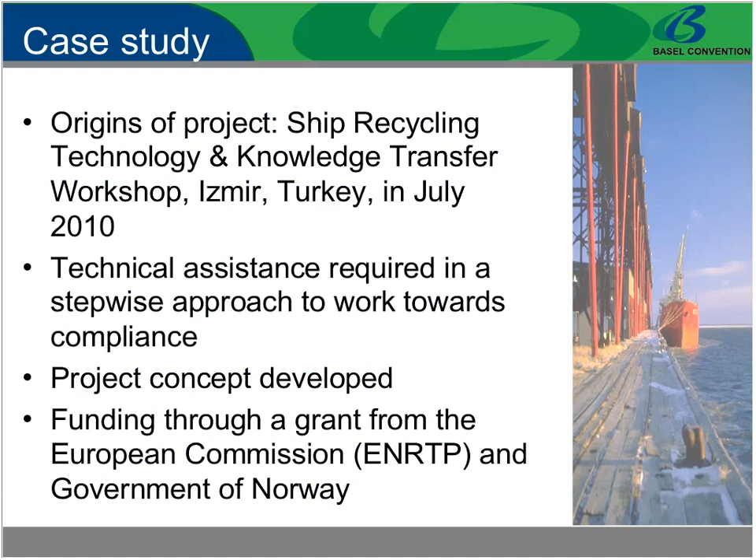I'm going to give you an overview of the case study and also a flavour of the guidance and training materials right towards the end. The work on that is just being finalised, and of course some feedback may even come out of this discussion that could be useful for that.

So I'm going to talk first about the preparatory work before we developed the case study. That initially required a number of field missions to Pakistan to observe current practices, undertaken by a local consultant. A field mission to Turkey was also conducted, because Turkey is considered a useful model in relation to studying ship recycling, particularly for the target countries of this case study and guidance. Then there was attendance at relevant meetings of the Basel Convention and the IMO Marine Environment Protection Committee with respect to ship dismantling. Those three elements contributed towards the background for developing the case study itself.

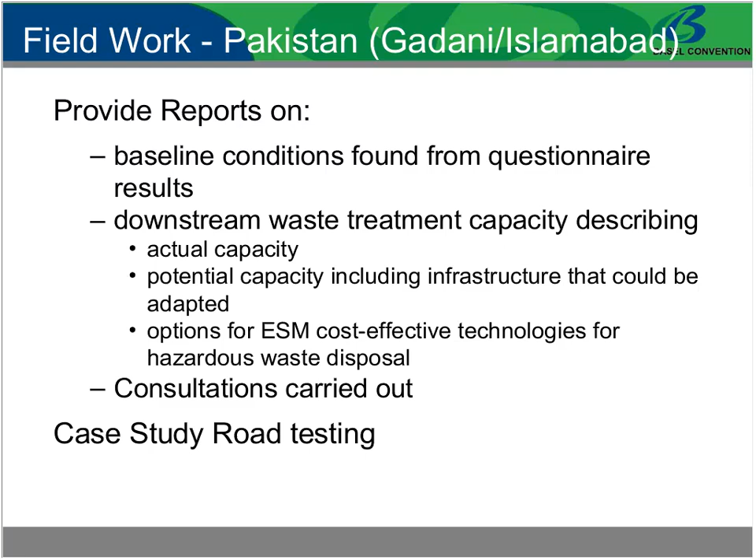The development of the compliance models then really focuses on the issue of environmentally sound management of hazardous materials and hazardous waste, which involves identification, removal, handling, storage and preparation for dispatch to downstream waste management facilities at a ship recycling facility.

I should stress at this stage that although the Hong Kong Convention and the Basel Convention cover a wide range of issues, these are, if you will, the highlights - the specific areas that this study is covering. We recognize there are overlaps and very close linkages with, for example, occupational health and safety, and inevitably they come into some parts of the discussion, but they're not the main feature of this particular study.

So we're identifying appropriate waste management channels for the key hazardous waste materials, looking at those specifically on board ships, for example as set out in the Hong Kong Convention's inventory of hazardous materials. That will lead us to devise methods to strengthen linkages between the Basel and Hong Kong Conventions throughout the entire ship recycling process. One can imagine that in the future both Basel and Hong Kong Conventions can be enforced, and how those two interplay smoothly will be an important issue.

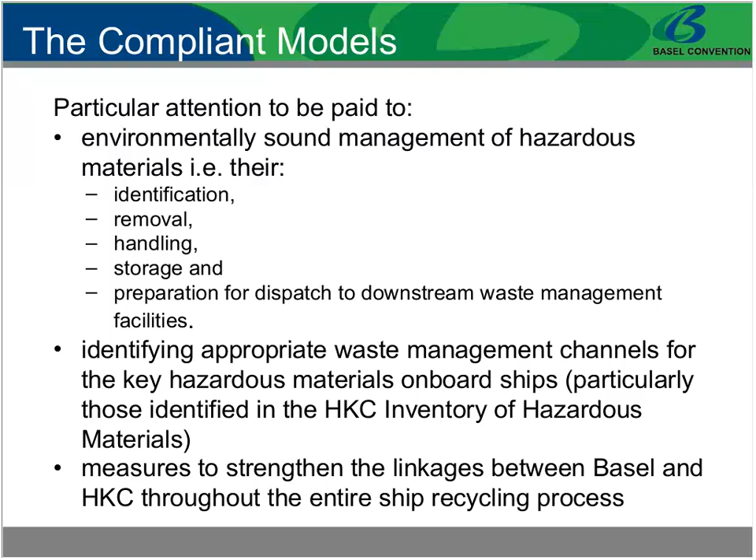So some findings from the field studies. We've looked in particular at Turkey, as I mentioned. The site is at Aliaga on the Aegean coast, and there are a number of facilities there, all with various certifications, quality management systems, and permits. They process around 300 ships a year, which is about 650,000 light displacement tons - that's the actual weight of the ship in effect. They use landing and afloat, or alongside, methods, as it's a fairly hard base to start with on the Mediterranean coast there.

Over time, the facilities have substantially developed hard standing with concreted roads and cutting areas. That's been developed over the last, I would say, 10 years or so. These facilities have been subject to continuous improvement - it's been active there since about 1974. Legislation has gradually developed to follow the Basel Convention for its management, as well as looking forward to the Hong Kong Convention.

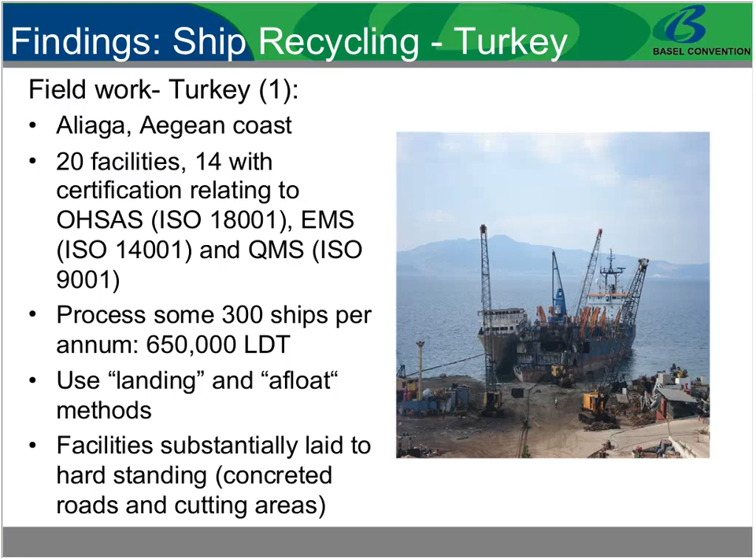Perhaps fairly rare, the Ship Recycling Association of Turkey is also operational. It is certainly an interesting feature of the way that they work there. They have a waste management centre which provides specialist training and specialist techniques, such as for asbestos removal and storage for liquids, available to all operators at the facility.

But off-site, they take hazardous waste from ship recycling over to specialist incineration, some distance away, and to hazardous waste landfills, particularly for materials like asbestos, which is the normal route for such waste.

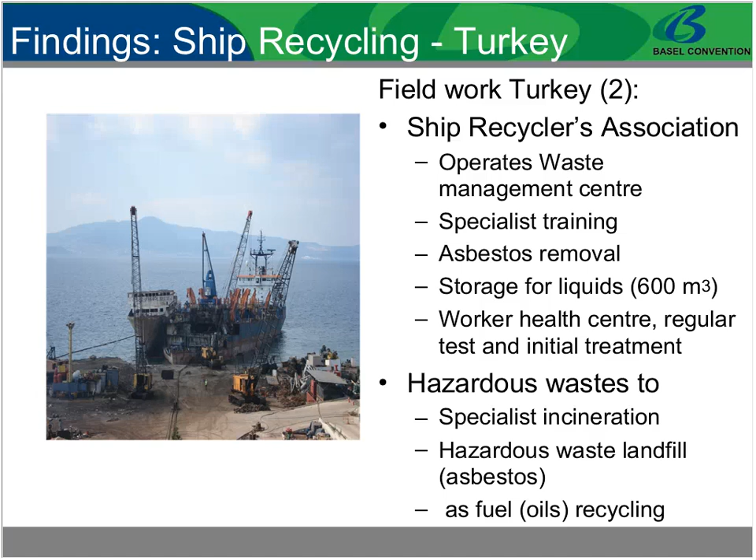Another feature of the field studies we discussed at length with the representatives of the ministries is that there are several of them involved. This is not an unusual situation where you have typically ministries of shipping, environment, and industry, so the legal framework for ship recycling can be quite complex. There can be a number of different pieces of legislation, all of which apply either on-site at the ship recycling facility or off-site.

They apply in Turkey the Basel Convention controls for hazardous waste import and have local inspectors that carry out the inspection work. I think it's important to notice that they have emphasized in discussions with us that they do actually carry out enforcement action when considered necessary, in order to back up the inspections and the legislation.

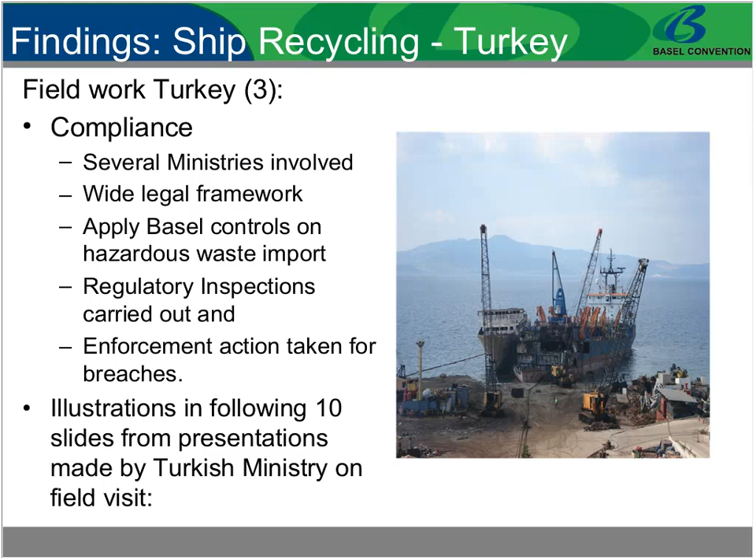Now, what better to describe how they do what they do than to actually use some of their own work. You might call that plagiarism, I call it a compliment. But the next 10 slides will show you some of the work they've done themselves that they've presented to us. So thanks to them for some description.

That's an example of the legal framework, this is simply for waste. I won't dwell upon the slide, but it shows you the level of complexity required to cover the many different aspects for sound and proper environmental management of the huge variety of materials that arise as waste requiring control. That's not unusual.

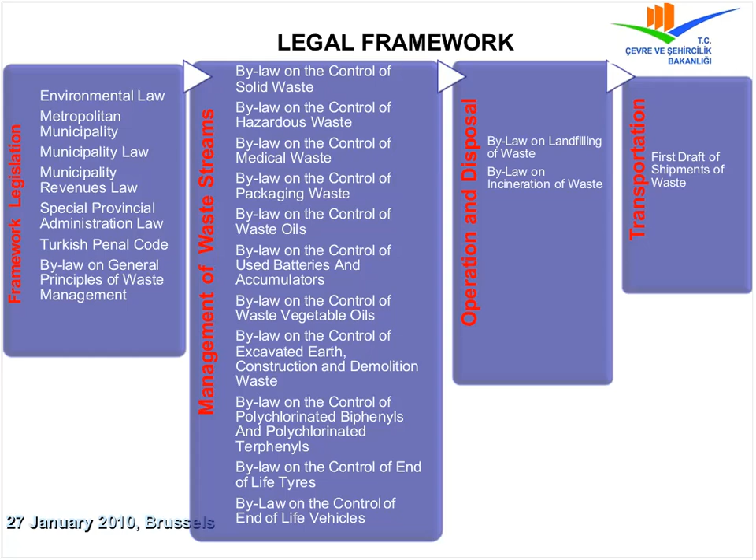Turkey also has a National Waste Management Plan. It covers the current 5-year period up to 2013, with a number of key waste streams, a dozen of which you can see there. They include hazardous waste, which would come from ships as well, requiring to be managed properly and strategically to make sure sufficient capacity is available.

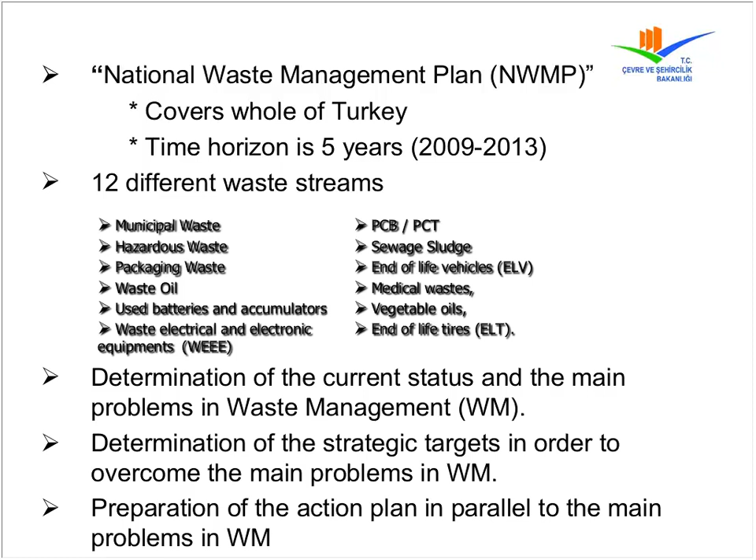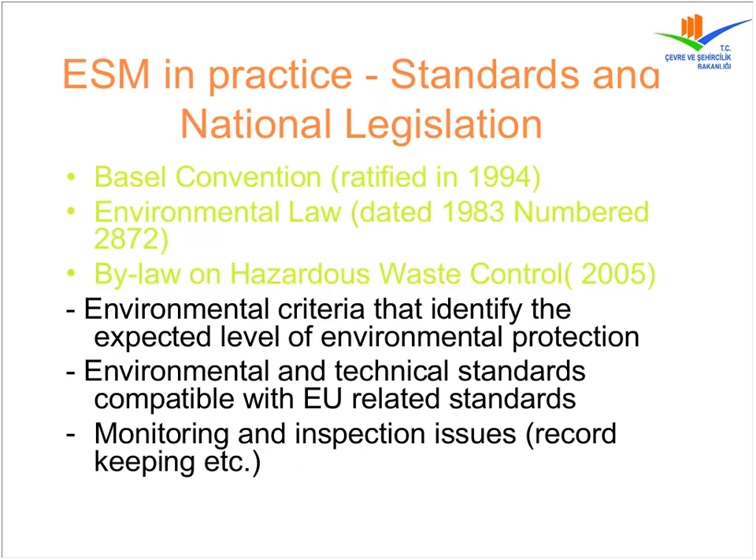They work on the basis of the Basel Convention through the environmental law of 1983 and the bylaw on hazardous waste control. They identify criteria for the expected level of environmental protection and have set standards against which monitoring and inspection can be carried out.

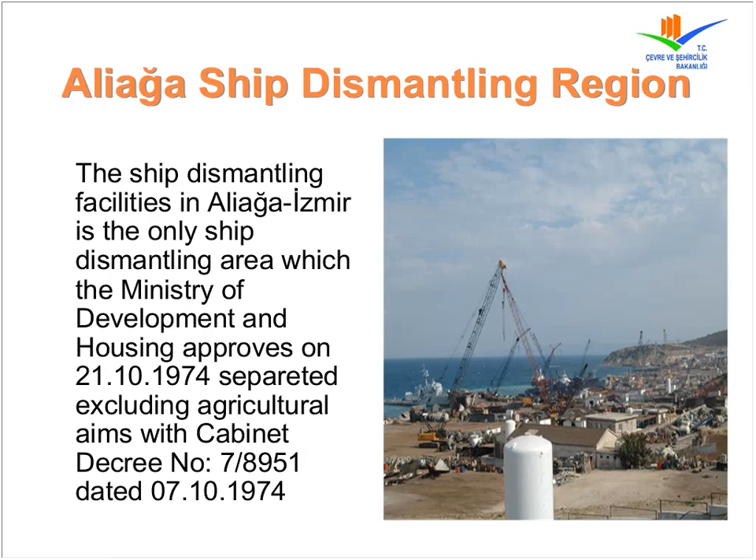It is, I think, as many will know, the only region in the area, which makes it a very suitable case from the point of view of this case study.

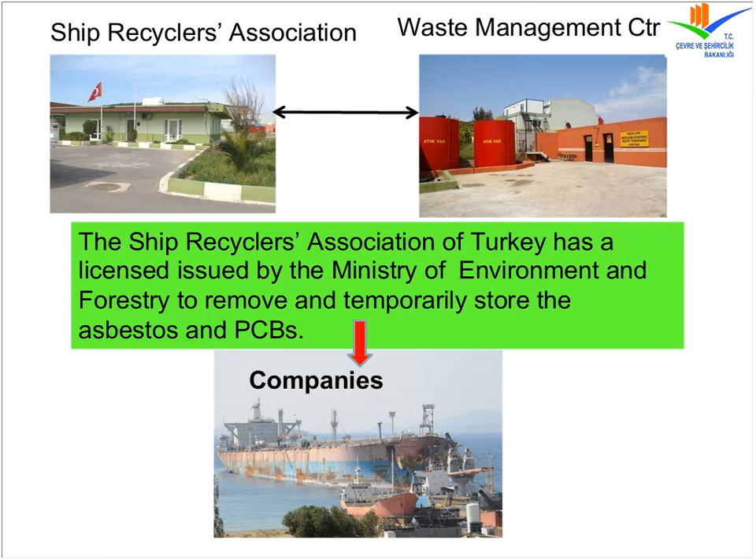Just a couple of pictures of the Ship Recyclers Association facilities, which has got a nice liquid and solid waste storage facility for use by companies.

Inevitably, with all that legislation, there'll be quite a few documents, and the local region, İzmir. The provincial directorate requires all of these and some more, I wouldn't be surprised, in order to make sure that all aspects for ship import for recycling are covered. Notice particularly the ship recycling plan, part of the Hong Kong Convention, is already there as part of their requirements.

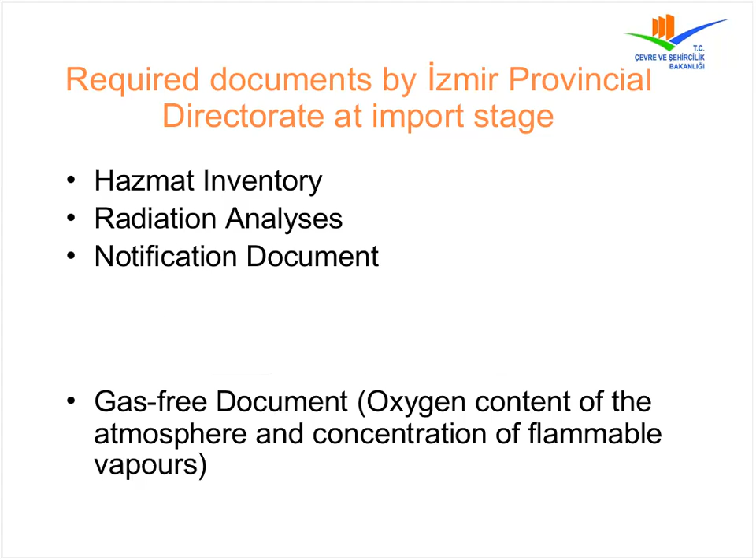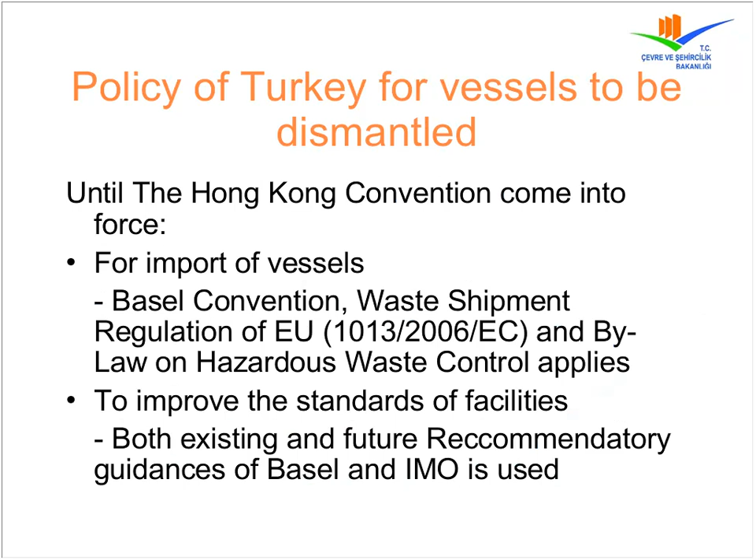The basic policy of Turkey is, as we've said, based around the Basel Convention, until the Hong Kong Convention comes into force, using the current guidelines of the Basel Convention and the MEPC approved IMO guidelines on ship recycling for the Hong Kong Convention. Not yet in force, of course, but they have been agreed, and therefore they're useful models to take into account.

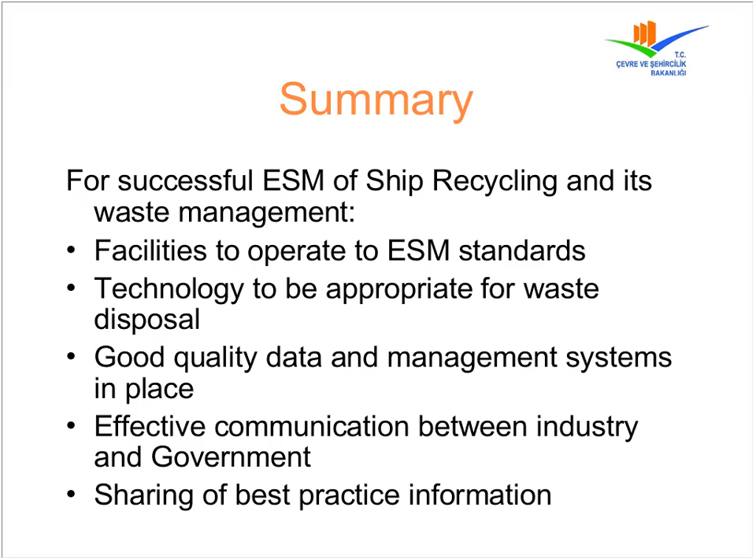So that's Turkey's summary of the way in which they carry out environmentally sound management - facilities operating to ESM standards, technology appropriate for the waste disposal. They use management systems and data and information, and the communication is a good point between the industry and the government, without which it's very hard to achieve effective compliance and sharing of best practice information.

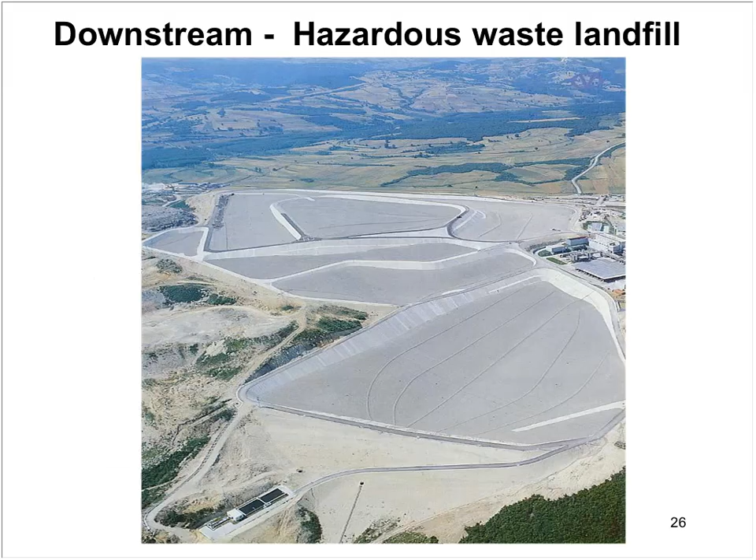Just some words on the field studies that were undertaken in Pakistan. This is where the beaching method is used. In some senses it's not dissimilar to that used in Turkey, where in effect the boat is hauled up onto the shore and dismantled. So the baseline report looked into this.

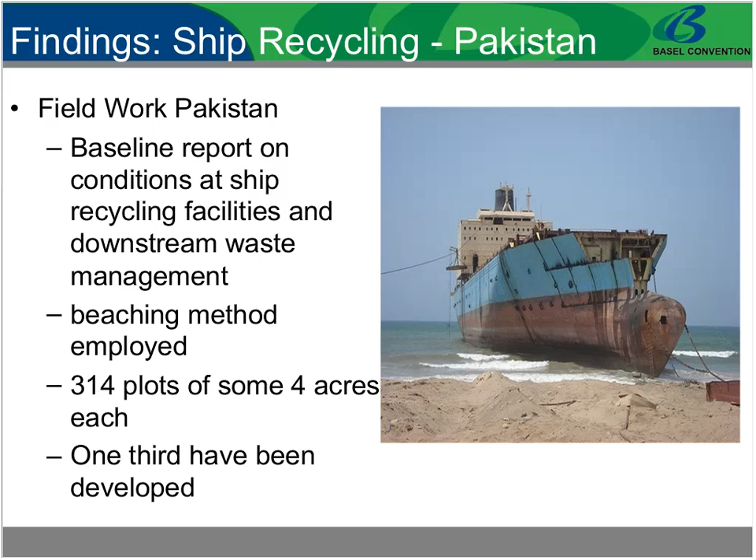There's a larger site, 314 plots of about 4 acres each, with some one third of these being developed. An earlier study from the World Bank was reviewed as part of this work, and identified a number of features of the facilities at Pakistan, amongst which was that asbestos is going to remain a significant long-term problem, as it was known to be still there in some fairly newly built vessels.

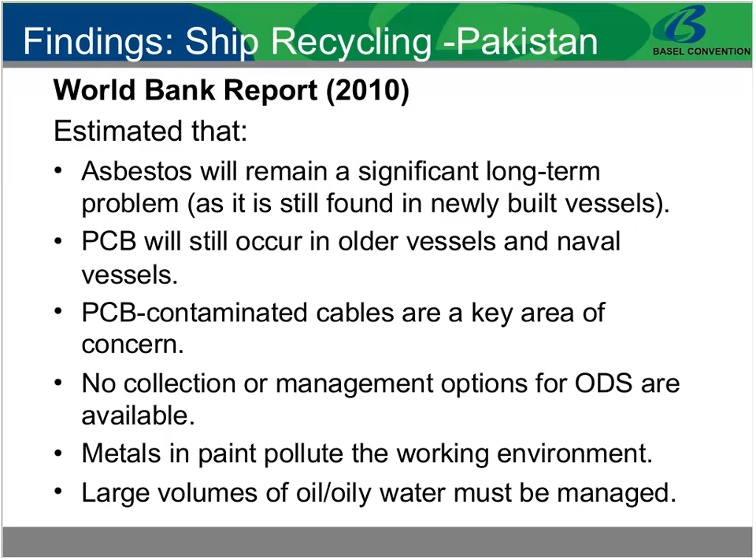Polychlorinated biphenyls still occur in older vessels and naval vessels, in cabling and various other parts of a ship. They could be solid or could be liquid in the case of transformers, where used as a dielectric. The cables themselves are a particular area of concern that isn't necessarily always looked for. There appeared to be a lack of collection and management options for ozone-depleting substances, like those used in firefighting and other means. The method of dismantling does give rise to paint chips, which themselves can pollute the working environment. And inevitably there are volumes of oil and oily water that need to be managed.

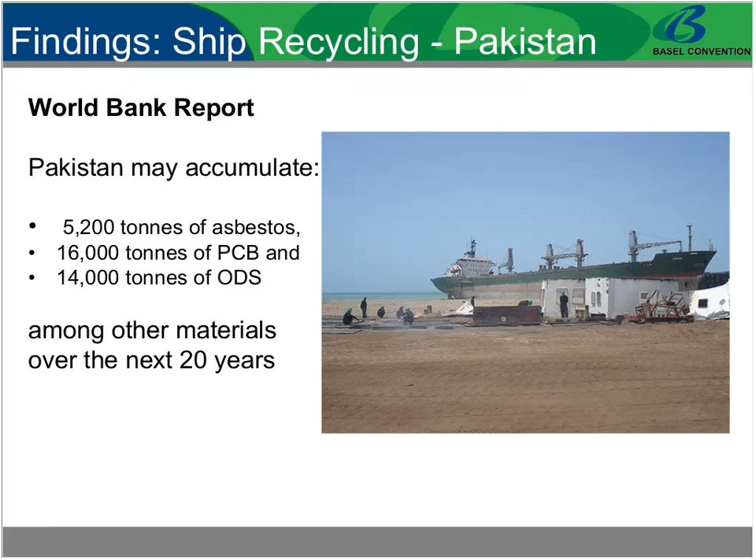As a result, the estimates from the World Bank report were that some 5,000 tons of asbestos, 16,000 tons of PCB, and 14,000 tons of ozone-depleting substances might accumulate in Pakistan as a result of ship recycling over the next 20 years.

The method of control is based around a no objection certificate, which in terms of the Hong Kong Convention will require significant development in order to ultimately become compliant with that. And that really means there will need to be extensive institutional building and infrastructure upgrading to meet the standards, and indeed development of new legislation as and when Pakistan decides that they wish to go in that direction.

The World Bank study report looked at the issues for recommendation in order to achieve certain objectives, such as reducing the risks and impacts on workers and the environment from any unsafe dismantling practices, providing safe storage, transport and disposal options for hazardous materials, and looking at means of achieving this through, for example, financing investments by perhaps entering into public-private partnerships, and the possibility of pre-cleaning of ships before they were broken.

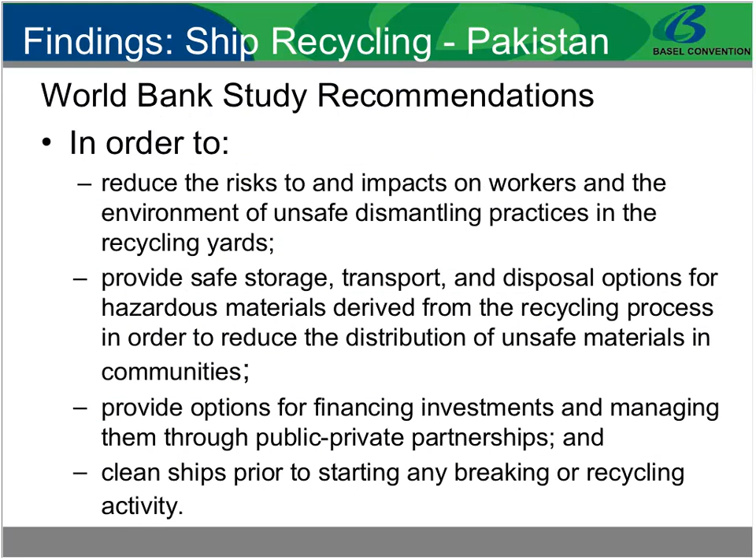And the recommendations to support those objectives look like this - obviously taking them out from a fairly long report - but it included improvement of enforcement on the ground, building a strategy for institutional capacity building, enforcement of regulations, and investment in waste management facilities, technical capacity building, and investment particularly in downstream hazardous waste management, both for Hong Kong Convention compliance and for the Basel Convention, where hazardous waste materials need to be treated in environmentally sound management.

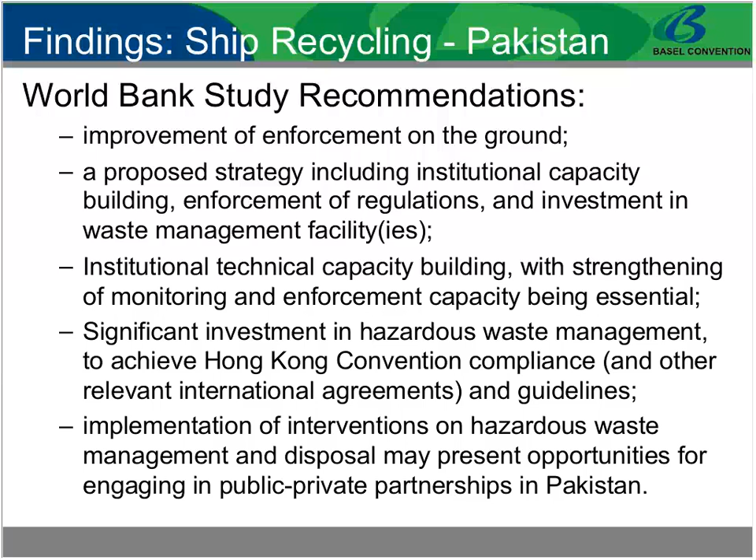That is the kind of area where interventions on public-private partnerships might prove useful, as is done in a number of other countries.

The investigations that were carried out on the current situation, from the questionnaires and interviews which I mentioned earlier as part of the local consultant's baseline report, looked at the way that ship recycling is carried out currently, and found that the basic institutional arrangements are, as in Turkey, spread across several ministries.

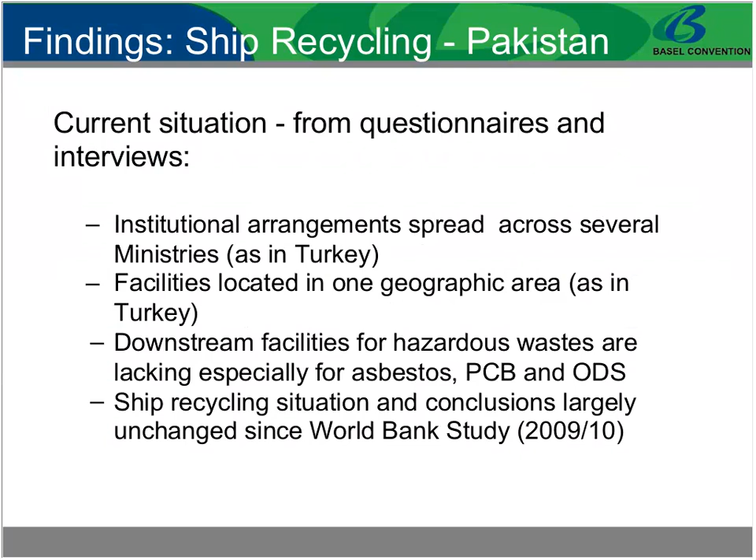There are facilities operating in one geographic area, as in Turkey, but the facilities for hazardous waste disposal are really lacking, particularly for asbestos, PCB, and ozone-depleting substances. And this really reflects pretty much the situation as discovered in the World Bank report and its conclusions.

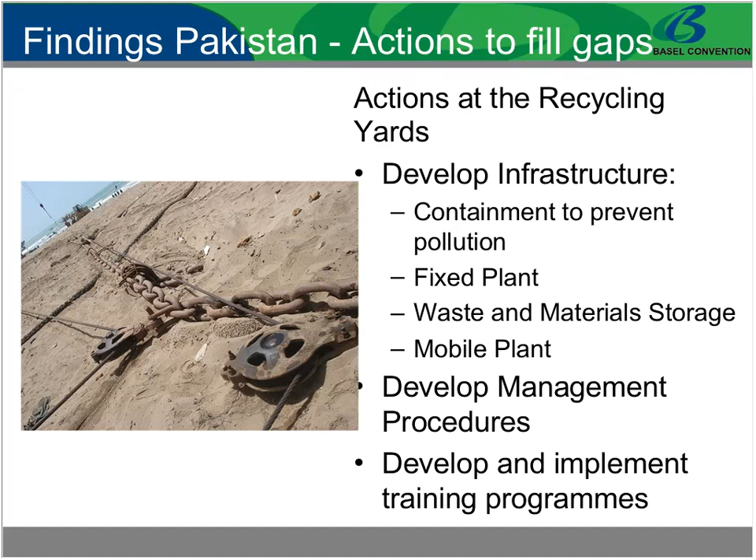Some actions to fill the gaps that have been proposed as part of the case study are these: looking at the recycling yards themselves to develop the infrastructure, particularly with respect to containment for fixed plant, materials such as winching and so on, waste and material storage, and suitable mobile plants for more hard-standing areas, the more one can make use of the efficient mobile plant. Management procedures and training to follow that up.

Downstream waste management will be recommended, that a full waste survey, including waste arising from other industry, is undertaken so that appropriate sizing and establishment of facilities for safe disposal of asbestos waste, PCB, ODS, oily sludges and oils that cannot be recycled or used as a fuel, and landfill of other waste for which there's no other management option, in other words recycling or reuse in some form, will be needed.

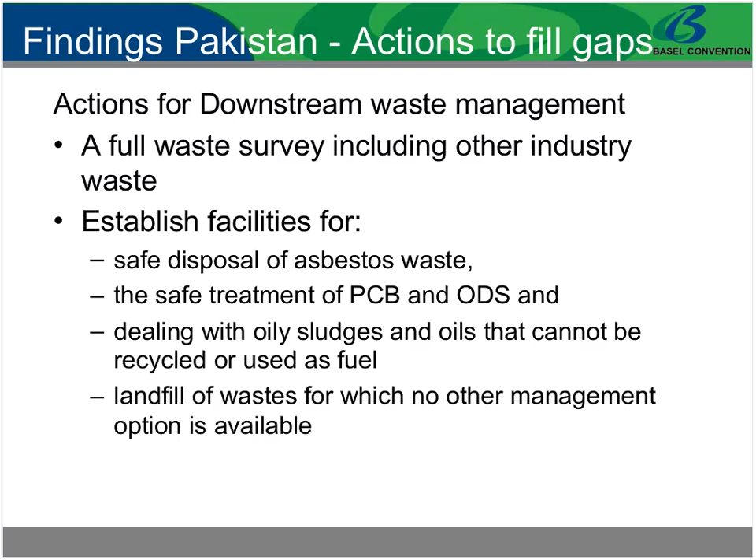On the competent authority side, there are two approaches for this: a needs assessment of the manpower and skills, training and capacity building, and a program of inspections for monitoring and compliance are all part of the mix that would be useful in order to extend and develop the implementation of both Basel and Hong Kong Convention requirements.

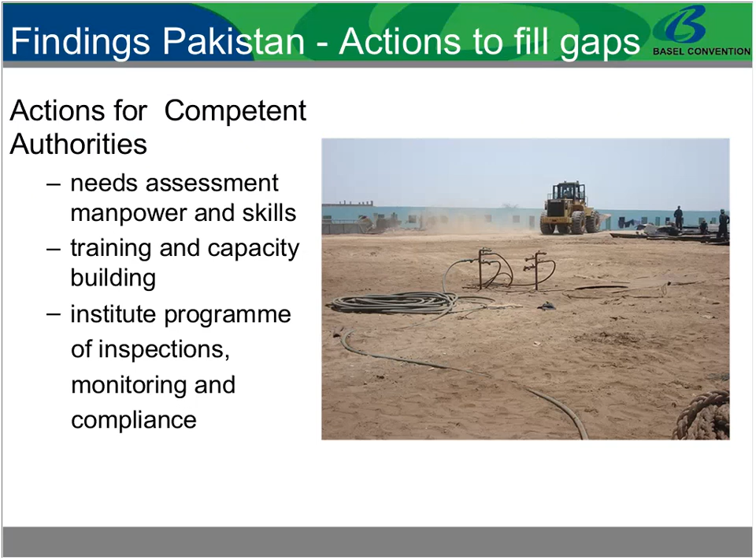The compliant model for this, therefore, is based upon both these two instruments, not forgetting the ILO instruments as well, as we mentioned before, but to cover these particular points: environmentally sound management at yards, environmentally sound management at downstream facilities, and monitoring programs to measure that the level of environmentally sound management desired is achieved, and that uses tools such as environmental assessment.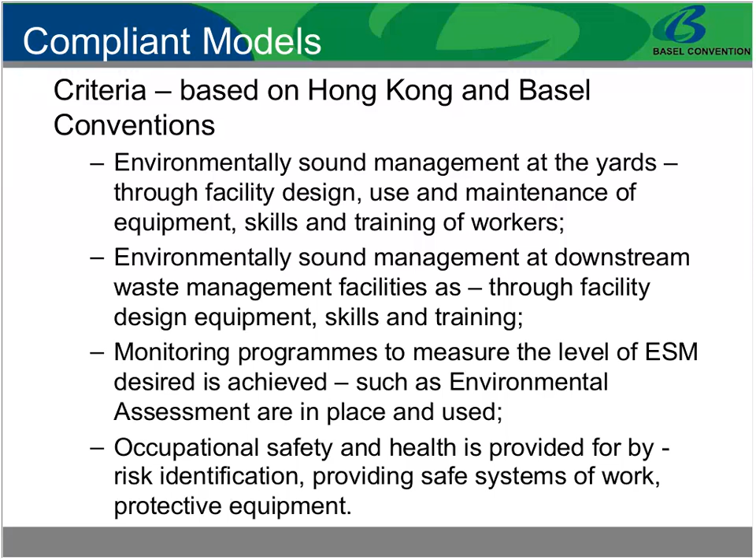Coincidentally almost, but clearly it will be formally more than that, occupational safety and health will also be provided for by similar activities such as risk identification, safe systems of work, which are also environmentally safe, and appropriate use of PPE.

The case study itself shows a number of checklists of the criteria, because this is meant to be replicable for a number of other countries, in order to see what the current situation is and to help monitor progress. Maybe these can be abstracted and these questions used by any country that is considering or is in the process of wishing to improve its compliance with Basel and Hong Kong conventions.

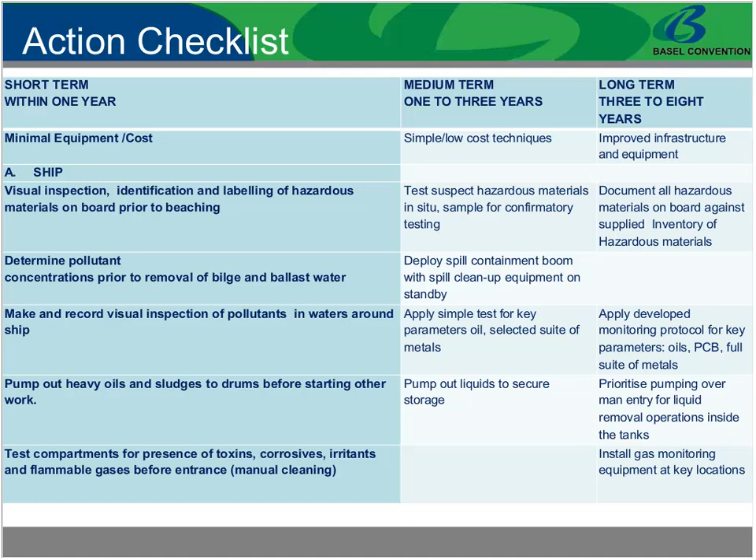There's an action checklist as well that identifies, with an updated version of, in effect, one of the tables from the Basel Convention guidelines, to look at, over a shorter time, because the Basel Convention guidelines are now some 10 years old, but within 1, 3, and 8 years, progressive installation of better equipment, facilities, and techniques.

Just a few words then to finish off on the guidance and the training materials. As Susan mentioned, two sets of supportive guidance and training materials are being finalised for management and supervisors at ship recycling facilities, and also for the competent authorities. They are different in character because the management and supervisors at ship recycling facilities guidance is really geared towards simple descriptions of effective techniques. The competent authority guidelines will be more addressed towards the practices of inspection and monitoring for compliance.

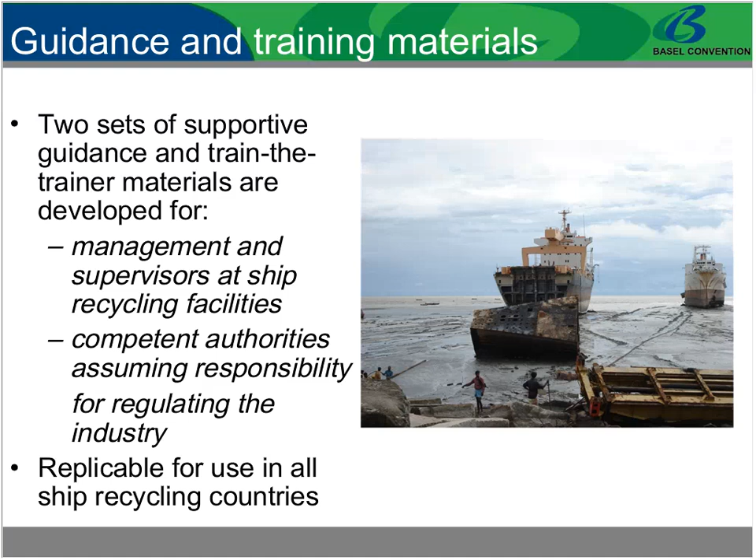They will have some common features between them, such as what does environmentally sound management look like, but the idea is that more or less any country that is using these should be able to recognize them and apply them in their own style.

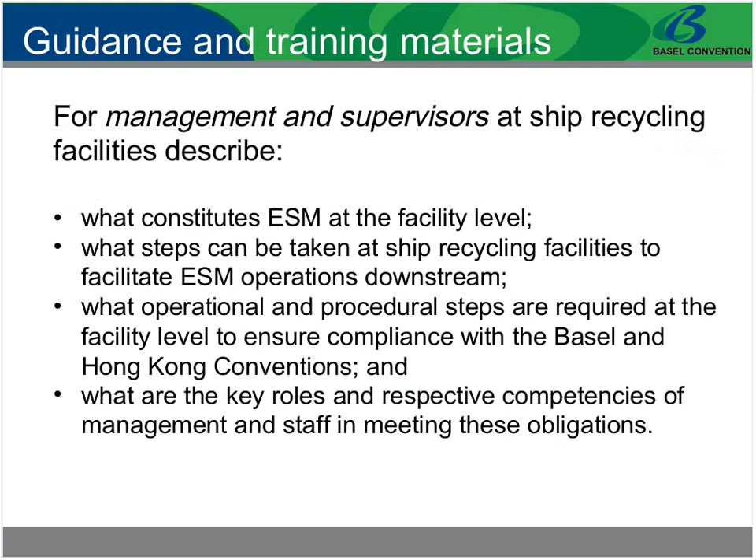Similarly, the guidance for the competent authorities responsible for regulating covers what constitutes ESM. There should be a common understanding and key roles and competencies. The other aspects for regulators and inspectors are what processes should be used in order to be effective for monitoring the compliance at the ship recycling facility and also at the downstream waste facilities.

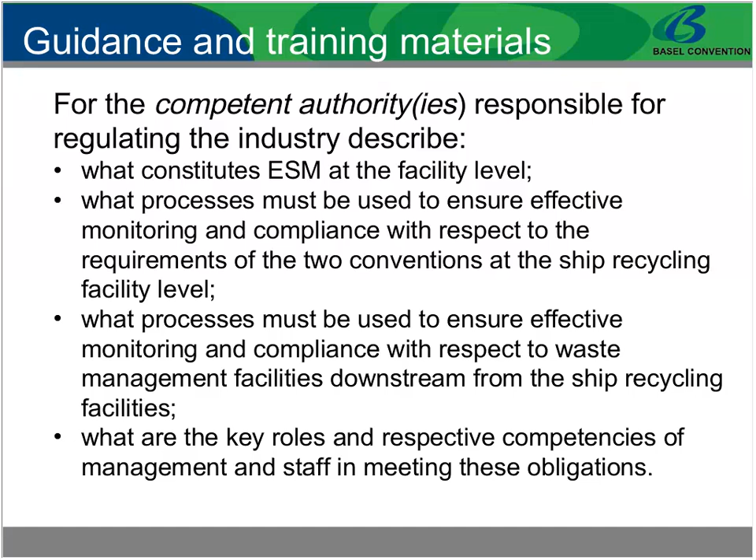Just a few pictures. This illustrates some of the points that we've been talking about.

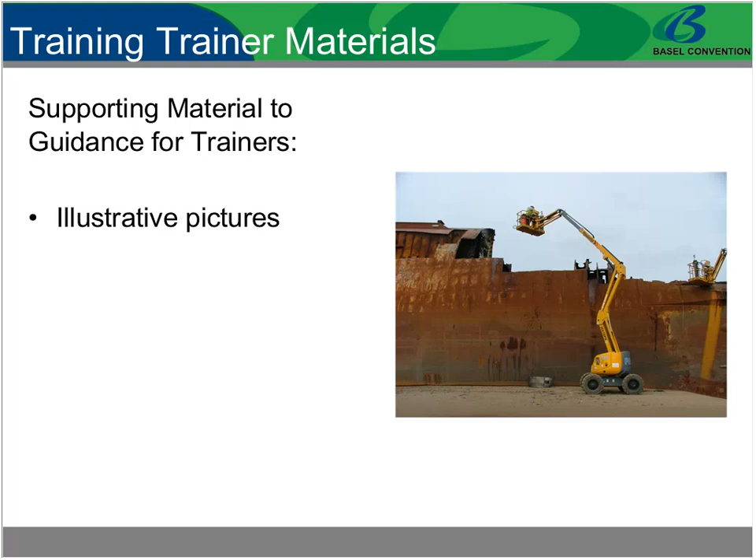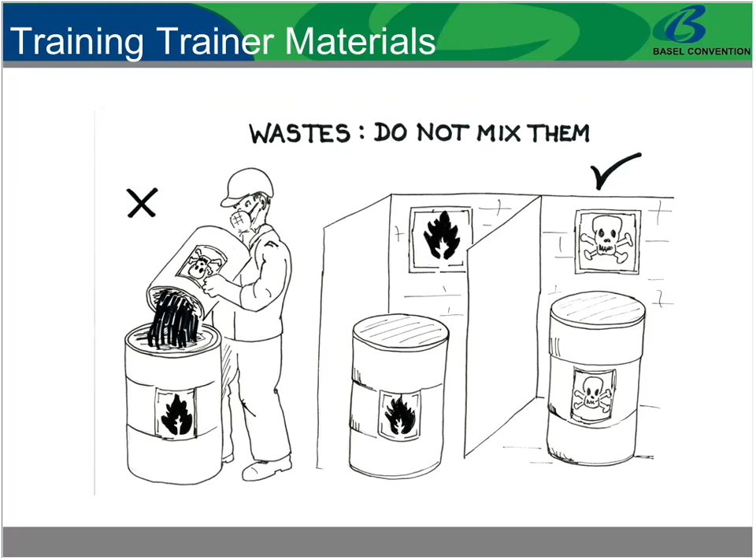This illustrates how to store materials so that they're kept safe, separate and identifiable. Some of the illustrations used in the training materials show a right and a wrong way to keep wastes separate, making sure they are kept away from the environment by safe storage.

Inspectors need things like checklists themselves to ensure that they are covering all the necessary points when they do a facility inspection, to be expanded on in the guidance itself.